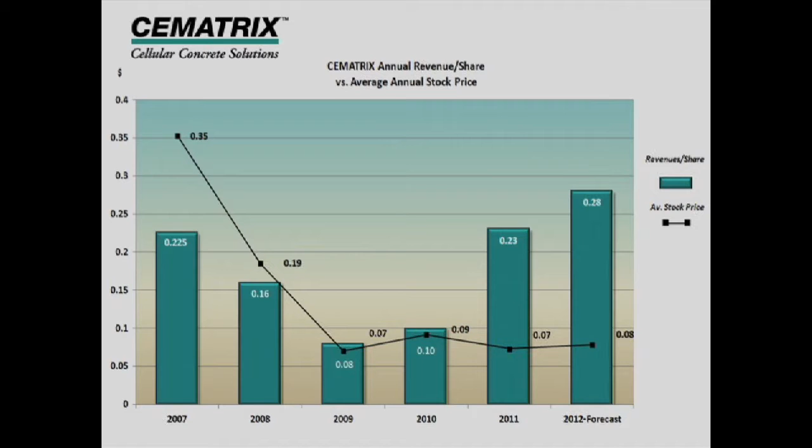So it's an industrial company with a very, very large runway, which can be hard to quantify. It spent years getting major engineering firms and government agencies on side to put a check mark beside its product, and anybody in the engineering sector can appreciate how difficult it can be to try to convince other engineers to endorse something. It has a proprietary process we'll call the special sauce.

It's diversified. Prior to the 2008 meltdown, it relied on one sector, and that almost took the company down. Now that sector is the smallest part of its business. Management wasn't afraid to get its hands dirty. It was out in the field. It was doing projects to get through the real tough times. And on top of that, management cut its own salaries.

There are only 33.4 million shares issued. The insiders own 22%, and the stock is only trading at 8 to 10 cents a share. The market cap is about 25% of this year's projected sales. The average daily trading volume in 11 was about 14,000 shares, and the average this year is about the same.

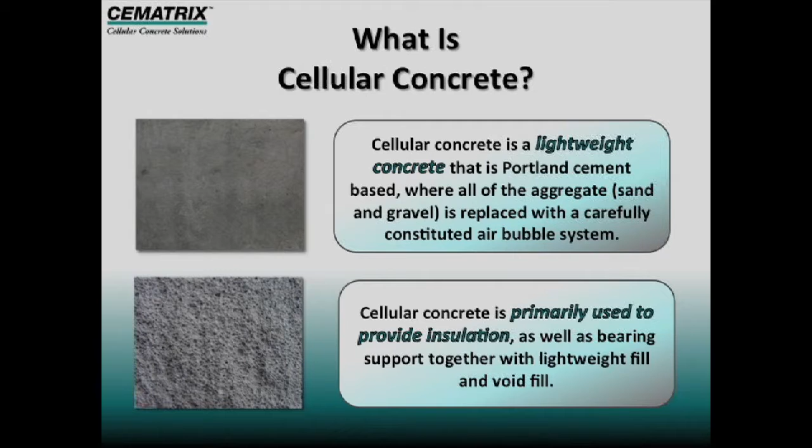Cellular concrete is a lightweight concrete that is Portland cement based, where all of the aggregate, like sand and gravel, is replaced with a carefully constituted air bubble system. If you look at the pictures, you can see that the aggregate is replaced by air bubbles, and you can see the samples on your tables as well. I put a sample out there for you to look at. What this air does, and this gives the characteristics of the material, which is essentially lightweight with insulating and some structural qualities.

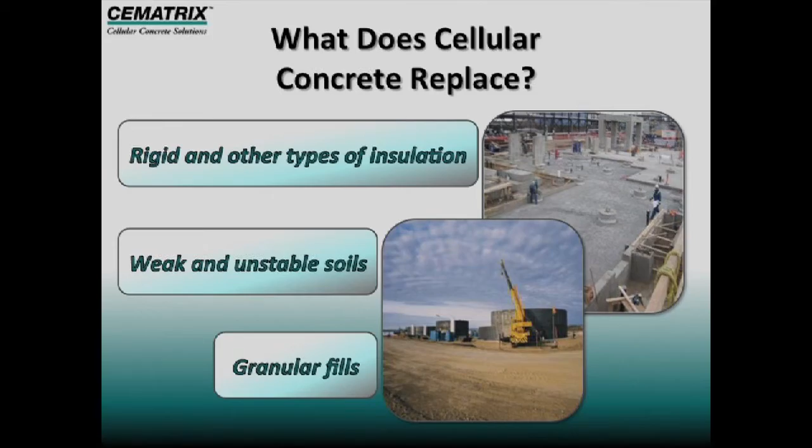What we replace essentially is rigid and other types of insulation, weak and unstable soils, and granular fills. Our customers are essentially engineers that would specify the product into projects, but more and more owners are actually ordering directly.

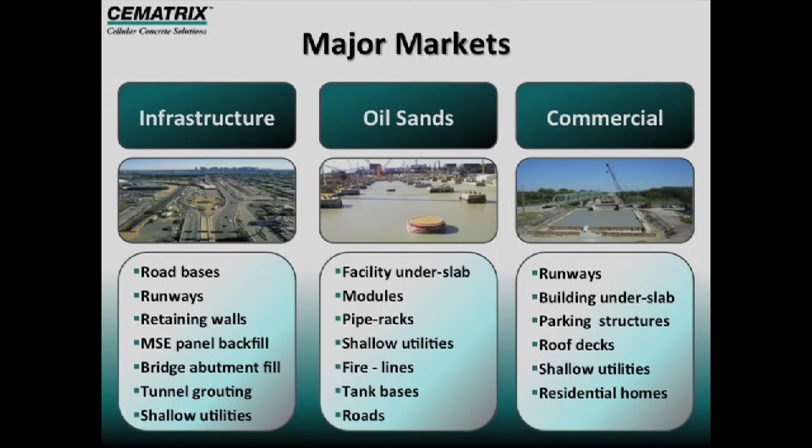The major markets are infrastructure and oil sands, but there's also a commercial market as well. For infrastructure, we have insulated road bases, runways, retaining wall backfill, MSE panel backfill, bridge abutment fill, tunnel grouting, and shallow utility insulation. For oil sands, we have facility underslab, modules, pipe racks, shallow utilities, fire lines, tank bases, and roads. And you can see the commercial applications as well.

The size of the market is really immeasurable. After 14 years of business development, CEMATRIX is just starting to scratch the surface.

If you look at cities around you, think of the pink insulation in the walls around your house - it's all around you, you don't see it, but it's there. It's the same thing with cellular concrete. You find it under the roads, insulating the shallow utilities, backfill behind MSE panels and backfill of bridge abutments.

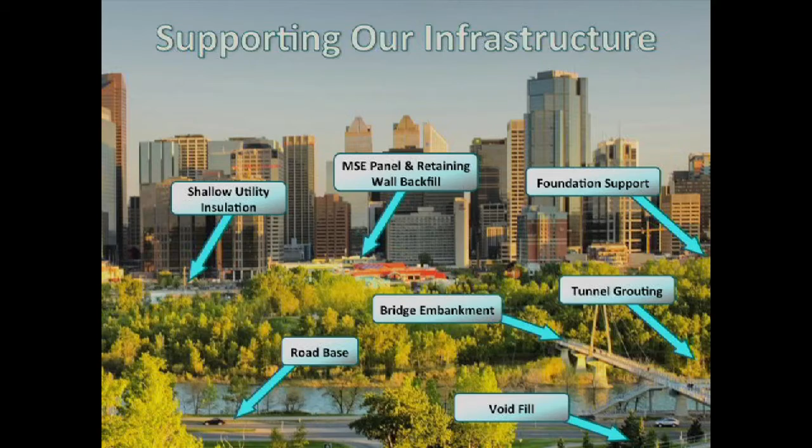We're currently pouring under the roads all over the city of Calgary. We're doing work at the McMahon Stadium, currently pouring at the Calgary City Airport behind retaining walls, insulating shallow utilities and tank bases, and more recently we'll be pouring a couple of projects down the Southeast Ring Road, pouring bridge abutment fill. In mines, it's the same thing, from fire line and utility insulation to pipe embedment to tank bases to foundation insulation and support. Essentially, we're getting specified into almost every end of each of these projects.

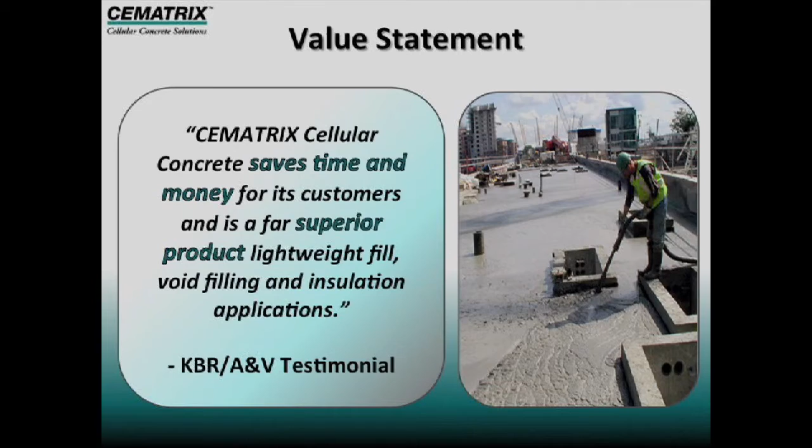So why is cellular concrete a product that has arrived? Why do we believe it's going to be involved in all of these applications? Well, it's essentially summarized in our value statement. CEMATRIX cellular concrete saves time and money for its customers and is a superior product for lightweight fill, void filling, and insulation applications.

We have a letter from one of our customers on a project done in 2008, 2009. It was not a large project. The letter basically says that we saved the company 5,000 man hours and 7 weeks of construction. So you start to get an idea of the savings that companies can achieve by using cellular concrete in their construction processes. I'll go over some of the projects now that we've done.

Keep in mind that in each of these projects, we save the end customer time and money. I'll only highlight the bottom left-hand corner, which is probably the most prestigious project that we've done to date, and that's at the Reagan National Airport in Washington, D.C., where we poured 13,000 cubic meters as a lightweight fill over weak and unstable soils to expand the runway aprons.

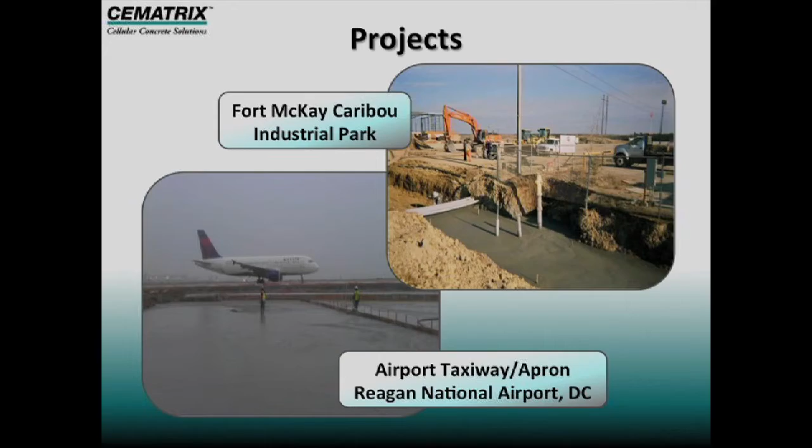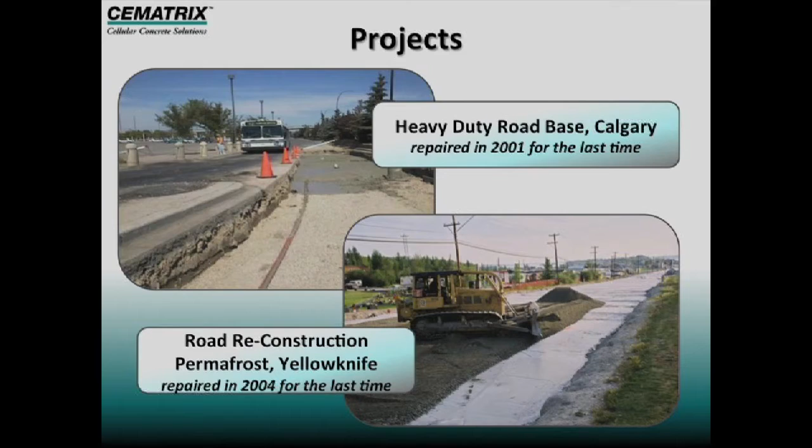These are two road bases where they're experiencing significant differential settlement because of weak soils underneath. The first was the heavy-duty road base in Calgary. The second was the road construction project in Yellowknife. Both of them, one was repaired in 2001 and the other in 2004 for the last time. They haven't had to be repaired since.

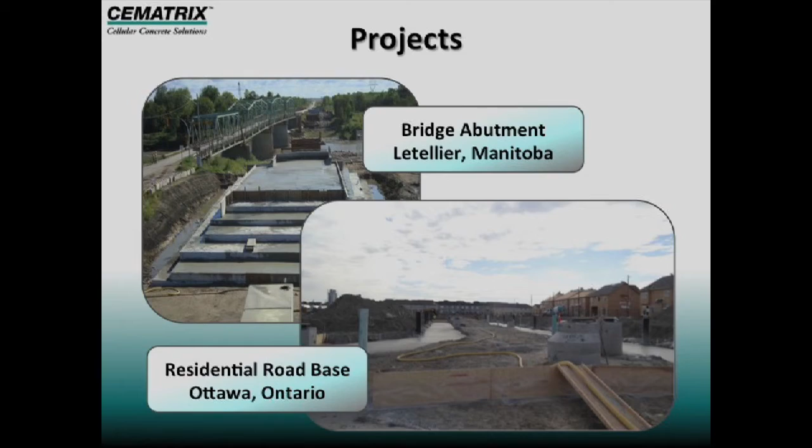Bridge abutments in Letellier, Manitoba, and a residential road base in Ottawa, Ontario. Essentially all soils along riverbanks or in old swamplands where they're now building residential subdivisions are very weak and unstable soils, and they require something to support them, and that would be cellular concrete. Bridge abutments in Winnipeg, Manitoba, and another bridge embankment in Victoria, British Columbia.

Another significant use of cellular concrete is tunnel grouting. This is a project in the city of Edmonton. It was completed a number of years ago. We've also completed a number of tunnels in the Ontario area and are really the exclusive supplier of cellular concrete grout for two of the larger grouting companies in southern Ontario.

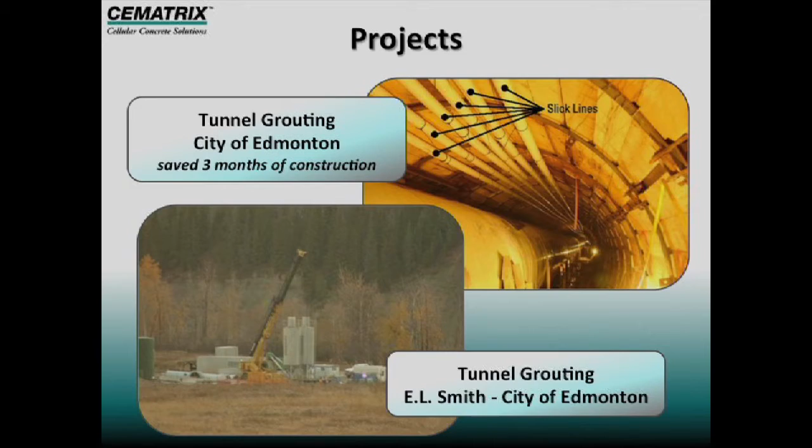One of our first projects that we were specified in the oil sands was tank bases at one of the oil sands projects. We've done tank bases - this was in 2004, and we've done all their tank bases since. We've done a number of tank bases in many of the other oil sands and refinery projects as well.

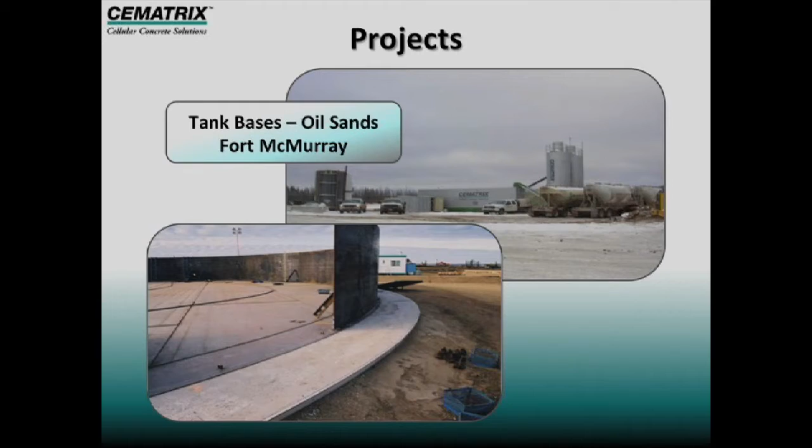Another big application is process facilities, in this case refineries, where it becomes an underslab insulation for all of their facilities. These tend to be large projects, and one of these projects is one of the ones that I mentioned that saved the owner or the contractor at that time 5,000 man hours and 7 weeks of construction.

This particular picture, the top right one, is actually a unique application that we started in 2011. One of our customers decided to use a different process in manufacturing their SAGD facilities. In the past, what they do is they go in any of these oil sands construction projects, clear all of the land, then bring a piling company and put piles in every 10 to 20 feet.

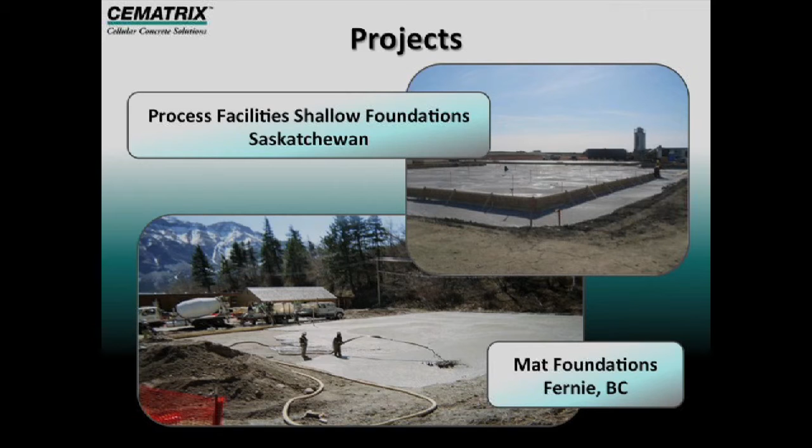And then they would tie all the facilities to those piles because it was very weak and unstable soils. Well, an engineer in 2011 convinced the owner that it would be better and much more cost effective to basically clear the land, pour a bed of cellular concrete, eliminate the piles completely, and build the SAGD facility directly on the cellular concrete bed. The project was extremely successful, and because of that, we've done a sister project this year. We just completed it in October of 2012, and there'll be many others of these projects over the next years.

Our business strategies: firstly, in industry diversification, we continue the diversification objective, expanding into infrastructure markets in other regions. We construct new equipment to strategically locate geographically in markets across Canada and the U.S. We develop new technologies to maintain our position as the leader in low-cost, high-volume, high-quality production, and look to strategic alliances and acquisitions to increase shareholder value.

Our strengths are a committed and experienced team of people, protected proprietary technologies, and engineering acceptance. We have provincial and state approvals, and we provide exceptional customer support to our engineering customer base. We continue our research and development both internally and with various universities across Canada, and we're a well-known industry leader, which actually wins projects for us.

Our equipment is completely mobile. We have capacity of over 300,000 cubic meters annually from 2 dry mix units and 3 wet mix units, and that's seasonally adjusted. We're currently adding new production capacity of 100,000 cubic meters, with 3 new units.

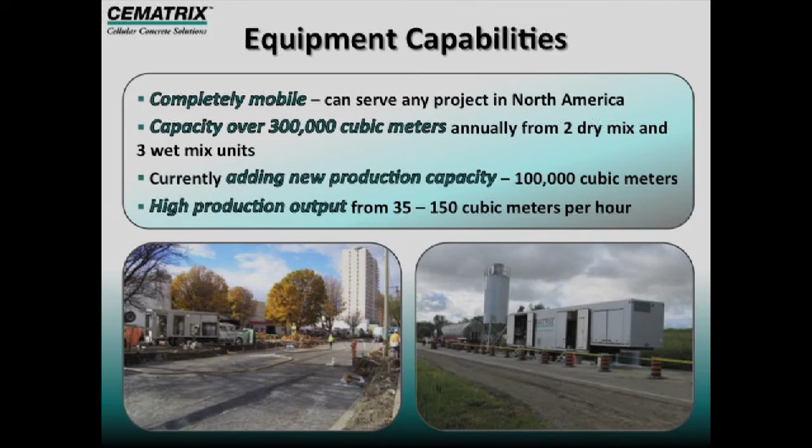One of the big issues with successful companies is de-risking the challenges they faced in building their businesses. One of the biggest risks we faced was being the sole supplier in Canada. Most engineering firms and end customers do not like to use a sole supplier unless the product is that superior. Fortunately, cellular concrete is superior, and because of that it's being specified by most engineering firms in Canada.

Engineering acceptance was an issue in the past, but not so much anymore because of all the projects we've completed. Economy was an issue before, but because of the diversification into the infrastructure market, there's less risk when there are issues with the economy.

Competition is minimal in Canada. There are some big suppliers in the US without the technology that we have, but they are quite capable. Seasonality of our business is always an issue because most of our business is through the construction period. We continue to plan to expand more in the US in order to reduce the issues around seasonality.

And finally, meeting the demand that's coming. The market is growing significantly, so we're a small company building a strong foundation. We continue to build equipment and hire staff to try to keep ahead of the game. But again, it's impossible to forecast the growth that we're going to expect over the next few years.

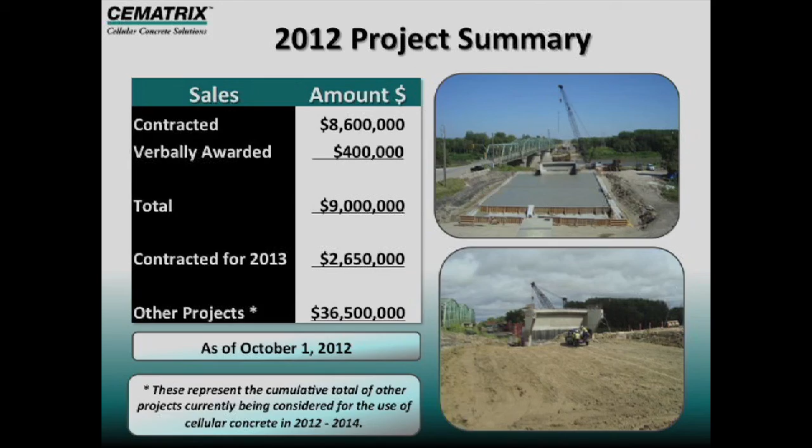Capitalization, as Grant had mentioned: we have about 33.5 million shares outstanding, 1 million warrants, 2.3 million options that are vested, and another 400,000 to 500,000 options which are not vested as of June 30th.

Just to go over the investor highlights again: we're achieving record revenues, the only company in Canada approved to use cellular concrete in various provinces, with a very unique proprietary process. Cellular concrete is gaining acceptance and being increasingly specified by all major engineering firms. We're selling into 2 significant markets, with projects geographically dispersed across Canada, and we're moving into the United States as well. We have 14 years of building strong relationships with all of our customers and government associations.

That's CEMATRIX in a nutshell. I hope that gave you a good idea of what our business is and why we believe that cellular concrete is a product that's arrived. Thank you for the opportunity to present to you today. Thank you.